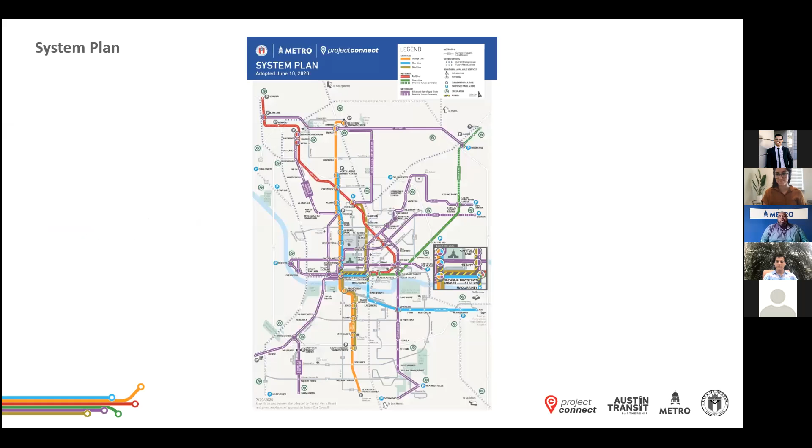Just a quick overview of Project Connect. What you're seeing here is the system plan adopted last year, June 10th, 2020. This is not the initial investment, but Project Connect as a whole, where the purple lines will be our Metro Rapid routes, which will come every 10 to 15 minutes.

That red line is the current train. The green line will be another commuter train that we will get going. Of course, there's the orange and blue line, which you've heard quite a bit about over the past few months. And then there will be the gold line as well, which will be a Metro Rapid route that we eventually plan to turn into light rail.

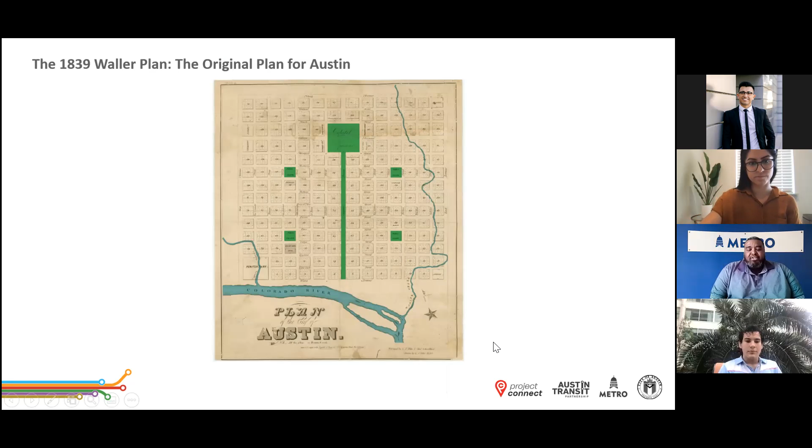This is just some history of transit in Austin. This is the 1839 Waller plan, kind of the original plan of how transit was working in Austin. Just giving you a little brief history to see how we've grown.

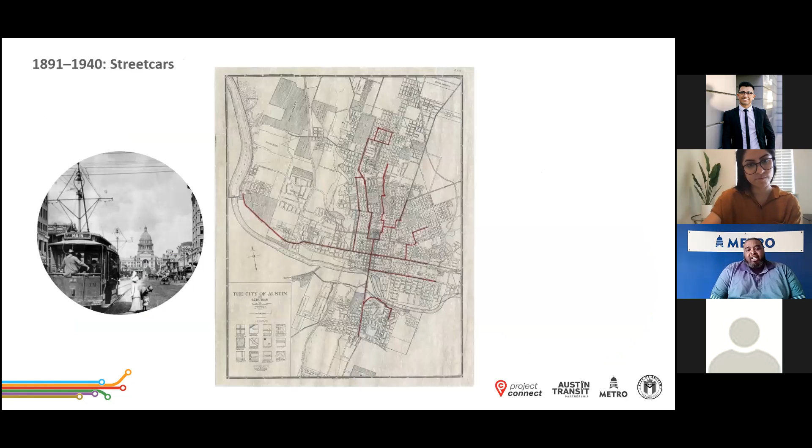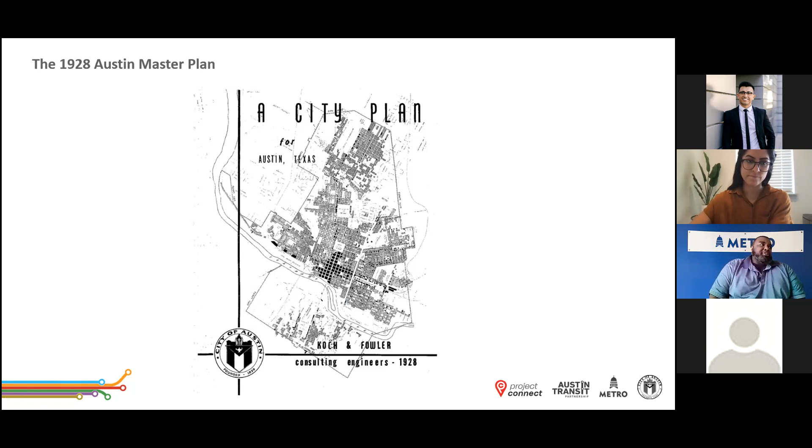Here's where some of the streetcars were happening in the 1800s to the 1940s. And we can't talk about public transit without acknowledging the 1928 Austin Master Plan. We know how that plan segregated the city, where the street that's now 35 was separated and segregated the city, with people of color east of that street. We have to recognize where we've come from as we try to make this better, and it's not something we're shying away from.

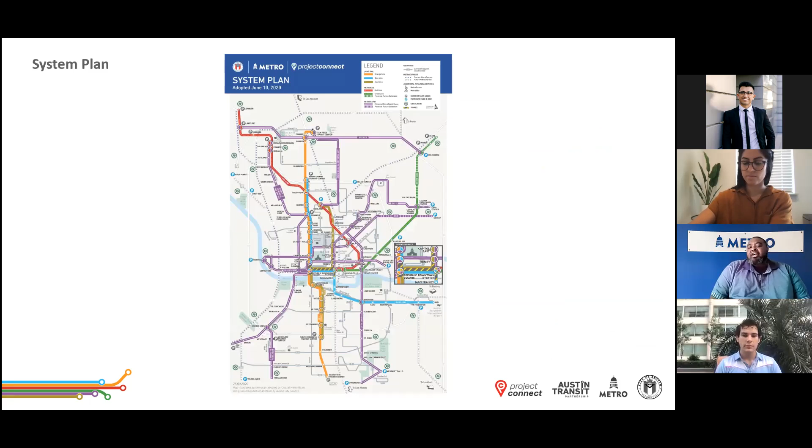And this is once again the system plan. Our goal for Project Connect is to have a high quality mobility experience for everybody. We want everybody to be accessible, so that everyone has a chance to use the system and get around where they need to go.

We'll have some travel lanes, and we'll have tree canopies as well as pedestrian amenities. Looking to upgrade some of the sidewalks that are out there as well and make sure we have connections to get to the train stations.

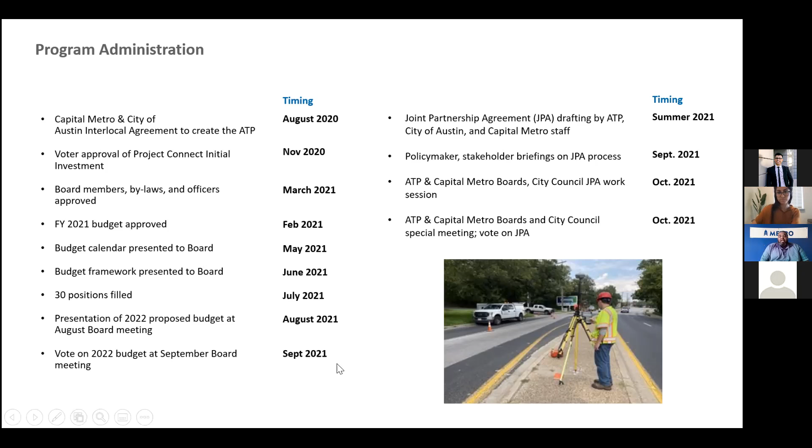We're going to do the preliminary engineering and the safety analysis to make sure we're going to do this safely. For the Broadmoor station, we're working with the neighbors there, trying to see what's the best way this is going to work. And we're coordinating with the Urban Trail team on the Red Line as well.

Broadmoor is a partnership with Broadmoor, the company that owns that property. And so they want to revamp that area.

And then part of that process, they wanted to be able to build a train station there for the Red Line, since it does go by it, where their employees can use it, but also the community can come and park and catch the train as well, which is something we didn't have at the Kramer station.

And then the Lake Line to Leander, we'll be doing some double tracking on our Metro Rail line. We have the design that's complete, and that track construction is actually going to be starting about the middle of next month or so.

So that's going to be exciting. There's going to be more double tracking happening along the Red Line, and what that will allow us to do, once we've built out all the double tracking, is have the train run more frequently and more often.

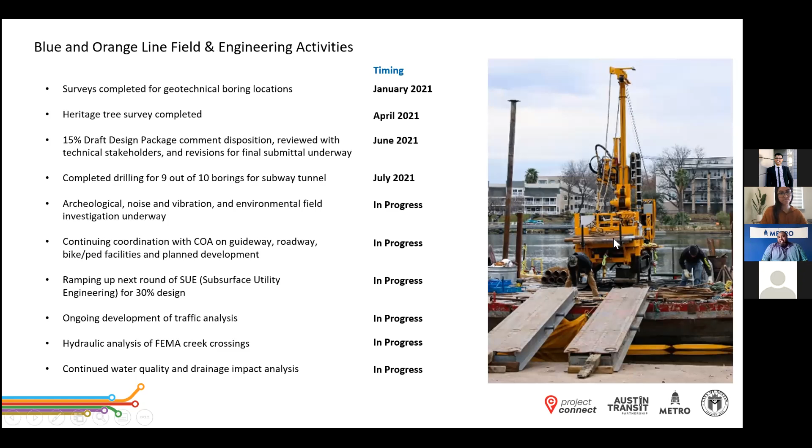Here's the engineering phase of it—we've been busy, it's been an ongoing process. Not too much on the technical side, but earlier this year you may have seen that vehicle on Town Lake doing the boring and getting sample readings. So we are heavy into the technical side of the program.

Pickup is our on-demand service. I like it—it's actually pretty cool. We can pick you up within 15 minutes and drop you off anywhere in those different pickup zones we have. We just launched our Dessau zone on June 15th.

Our South Menchaca zone launched on July 27th, and in two weeks we'll be launching our North Oak Hill zone, which we're excited about. We're reaching out to the community and getting it integrated with our app even more—we'll have dashboards where the community can find out how things are working.

With Pickup we have these different zones—about 9 or 10 of them at the moment. Within those zones, it's like Uber or Lyft but for public transit, where a vehicle comes to pick you up within 15 minutes and drops you off wherever you want to go in that zone, for the price of bus fare. If you have a bus pass, it works too.

This is what Project Connect is made of: the Austin Transit Partnership, or ATP, as you'll hear it referred to. Their role is to help create and get these lines going—the Orange, the Blue, the subway, the Green Line, and facilities. CapMetro will do what it's always done—operate the vehicles, whether buses, trains, or Pickup—and work with the City of Austin.

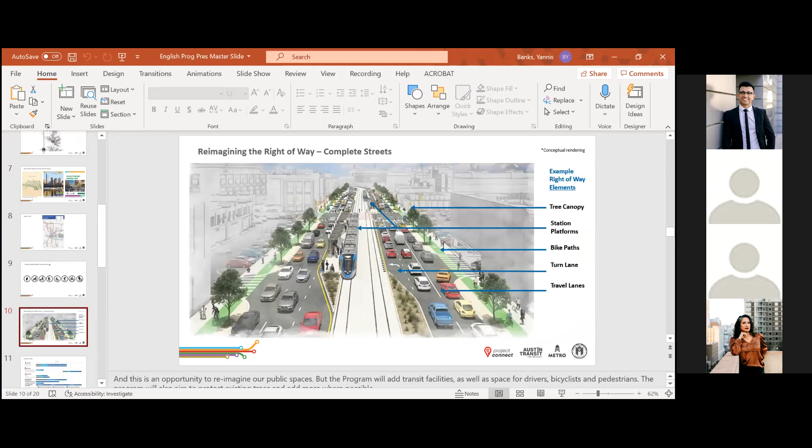This photo, which one did you say? I think it was... let me see. So that's the original, that's what that looked like. It's like slide 10, maybe. Slide 10. Oh yes, what it could look like.

Sure, yeah, so that's interesting - that's just one concept of how it can be done. Like I said, there's going to be times where it's center running, times where it's going to be underground, times when it'll be above ground, and times where it could be on the left or right side of the street, just depending on the right of way - which they'll call ROW, that stands for right of way - just depending on how wide or how narrow it is.

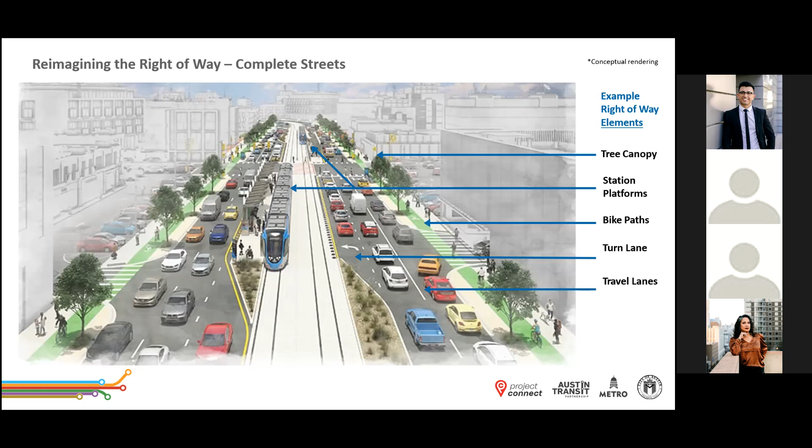We're working with what we have, and we're trying not to be as disruptive as possible. We also understand that not everybody is going to be able to ride the buses or the train. We know that, so we want to try to limit the damage we do to the travel lanes as much as possible - make sure the cars that can still go won't hit any pinch points, but also make sure our vehicles can move as well. So that's the dance, the tightrope we're walking, making sure this is beneficial for everybody, with the understanding that not everybody will be able to or may want to ride public transit, and we need to make sure they're able to get around too.

Perfect, thank you. I see Amanda raising her hand, and then Isela, I believe, had a question right after that. Sure. Awesome, thanks so much Yannis. This was really informative, it's great to see everything, the plan, spelled out so clearly.

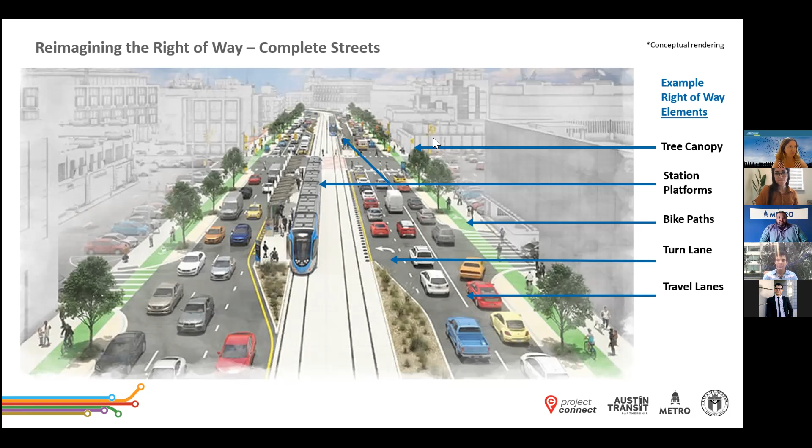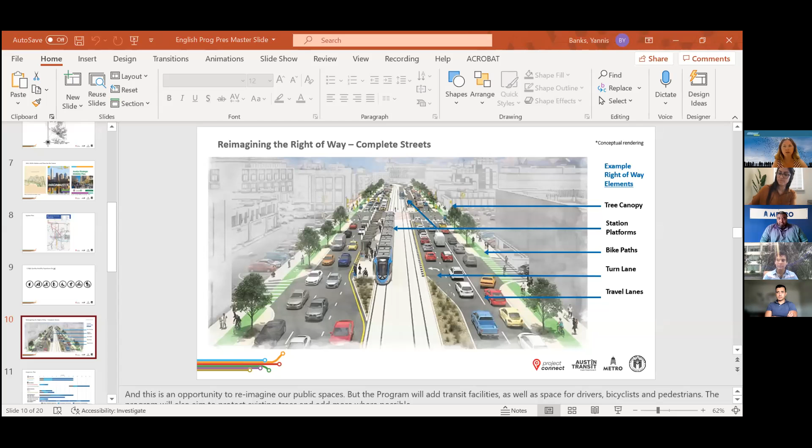So thank you. I did have a follow-up question on the anti-displacement fund you were referencing earlier. Do you know the timeline for when that will be? I'm assuming they're doing some research and work on what it should look like right now - do you know when it will be ready to roll out, or where we can get more information about that? And do you know if that 3 million is going to be used for direct pay - are those direct payments to individuals that could potentially be impacted?

Like their homes are in areas nearby, or how does that fund work? Sure, so it's 300 million. Just to be clear, it's a lot more than 3 million.

What you're seeing now is the CAC and when they are meeting, that's what they're working on, that's what they're going to work out. Is that the question you asked? How will this money be used? Will it be payments to help people stay in? Will it be whatever they can think of? There's no option that's off the table.